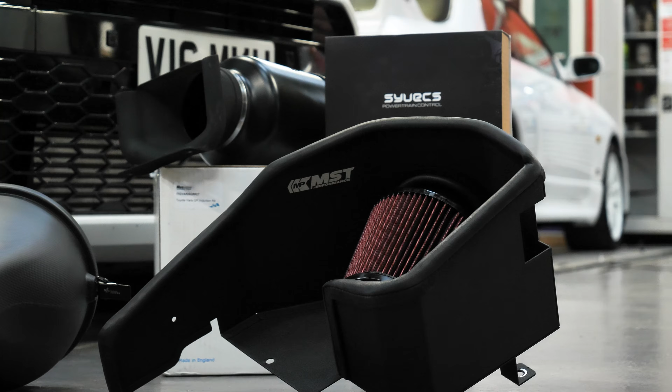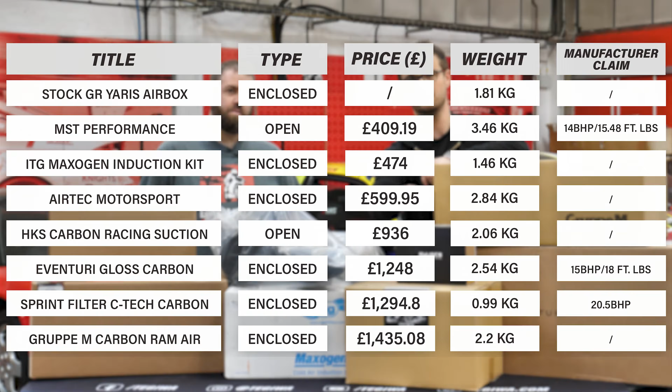Fresh off the back of our GR Yaris exhaust test, today we're doing an intake test. So we've got 7 different filters here today, ranging from open ones, closed ones. We've got Sprint, Eventuri, HKS, MST, ITG, Airtec, Gruppe M as well, and we've got a Syvecs all-wheel drive diff controller as well that we're going to use on the dyno, so we can put it in burnout mode and take some figures.

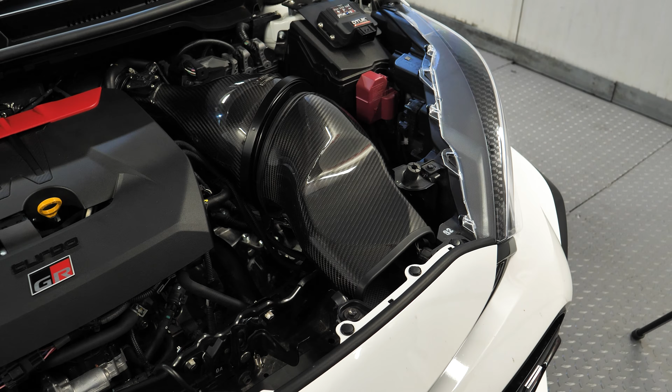What do you think is going to perform well today, Matt? Well, on the road, I think that the enclosed ones are going to be good. We've got the Eventuri and the Sprint, which we've already seen from other Yaris owners, giving really good gains. So keen to see what they do, but depends what you want, really, doesn't it? If you want the noise, then you can't beat an open filter, can you?

Yeah, I think it'd be interesting because people go for intake for a few reasons, don't they? Sound, the visual appeal, and also the performance. So there's 3 different factors there, and they start from £400 up to 1,400, I think. So there's a few different options there. So we're going to start unboxing some, do some data logs on the standard filter, and jump right in. So let's get on with it.

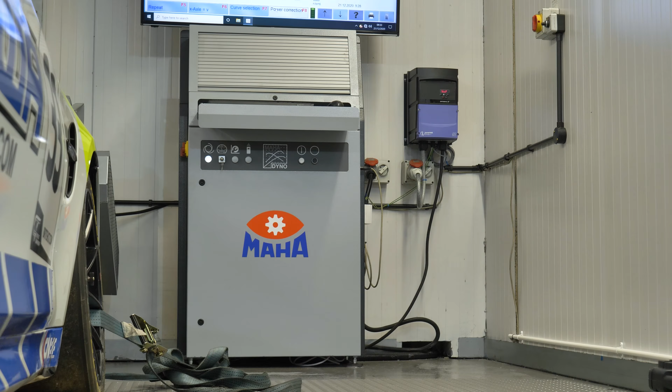So the GR Yaris, as we all know, is a 4-wheel drive car, but they are notoriously hard to dyno in 4-wheel drive mode. So unfortunately, here we only have a 2-wheel drive dyno. So to make it a 2-wheel drive Yaris, we've got this Syvecs powertrain control unit here. This is a quick install into the boot, and it enables the rear diff to uncouple when we pull the handbrake. So we can just dyno it with the front wheels on to make it super simple and super reliable. So we're going to chuck that on, get the standard car on the rollers now and see what it's making.

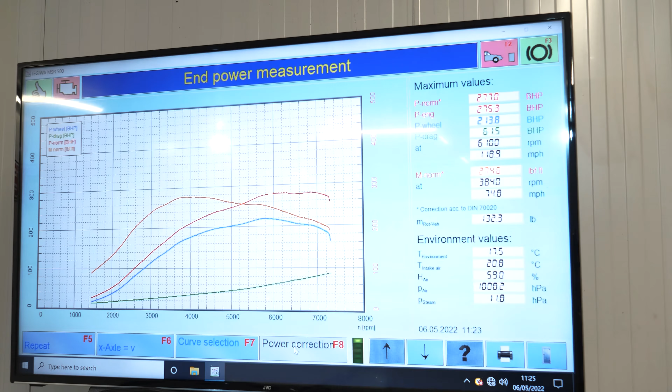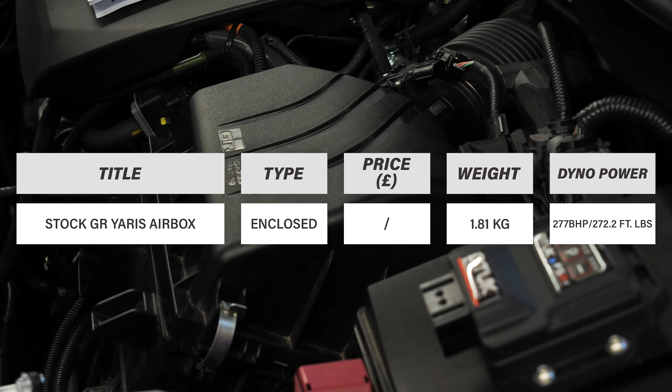Right, this is my GR Yaris, and here is a standard airbox. So first of all, just a quick disclaimer, you might notice this box in the corner. It's a DT UK Stage 1 tuning box. It is going to be disconnected for all of these because I know that most people won't run something like this. So we do have this blanking connector that's just basically bypassing that box and letting it all run as it was standard. So just ran it up with this standard airbox in place.

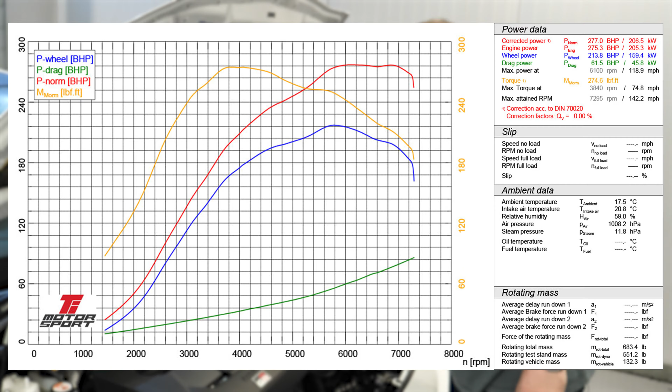It's around 277 horsepower, which is great. So that means that it does have an ITG panel filter in here, and the GPF delete from the exhaust test, I kept that on the car. So 20 horsepower over claimed, which I'm really happy with. So some of the airboxes that we have today finish here, which is just at the end of this flexi pipe here, and some of them go all the way to the turbo elbow, which is going to make things a bit toasty for me, but that's okay.

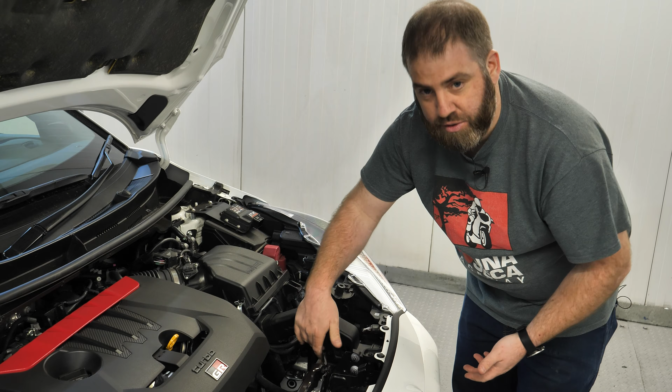And so the standard airbox has a little feed here that just comes from this little vent in the grille. The standard one though, if you look underneath it, it's got holes in it. So the air path's a complicated thing, but some of the air, as far as I can see, that comes in here can just go straight out again. So a lot of the airboxes that we've got have a dedicated feed that fills this sort of void here, and hopefully should provide some good gains. So the MAF housing on this, we've got not too much of a lead up to it in a straight, but we'll pop the airbox lid off in a second and have a look.

Afterwards we've got a nice straight pipe here. So what's important is that we get a similar sort of effect on the other airboxes for this to work as it was originally intended. It's okay to have it on a bend, it's okay to have it wherever you like, as long as it's kept consistent, because the manufacturers will calibrate their standard map to suit this in a particular orientation or direction.

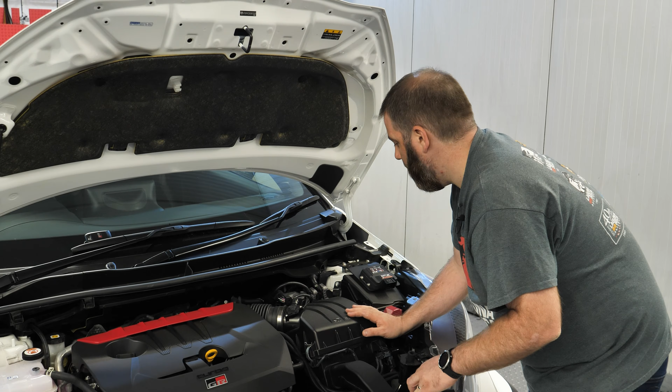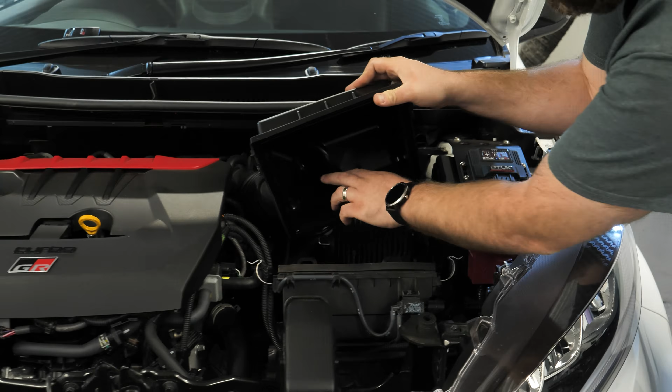So we'll see. I think this is going to be the biggest effect, how we can get the air smoothly past this and keep it repeatable. So right, let's have a look under the airbox lid. As mentioned, I do have an ITG panel filter in this. As we can see, there's not an awful lot there before the MAF, so air's going to be not the straightest, but again, Toyota have calibrated it to that, so we should be okay.

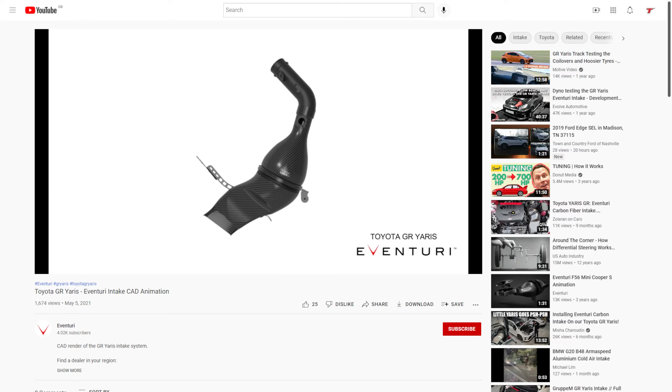And as I say, when we were doing the unboxing, especially the Eventuri, they've done a lot of CFD, a lot of their own testing, so expecting that to work really well. Okay, so the next one is the Airtec system. This retails at £599, just a little smidge over, I think. This is an enclosed system. We were going to unbox it, but there is no box, so we're going to unplastic it. Comes in two different pieces, so let's unpack it. Done.

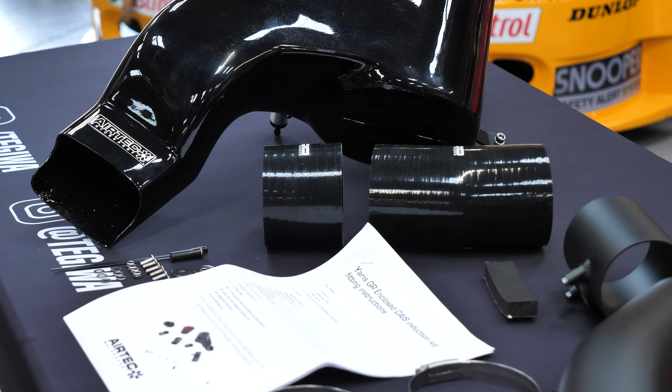Okay, so just unplasticed it, and got a couple of silicone joiners here, hard pipes, nice finish on this, nice Airtec logo, and nice gel Airtec sticker on the front of the intake. We've got some instructions with it. Something that's interesting, I don't know how much of a difference it's going to make. We saw on the MST how long the MAF housing pipe was. On this it's quite short, so whether some turbulence will happen, I don't know what effect it's going to have. It'd be interesting to see.

No air freshener again though? No. They've really set the bar there, didn't they? I mean, set the bar high. Yeah, I don't think we're going to get that with the... I'm going to be disappointed for the rest of this video, to be honest. Yeah. Well done, honesty.

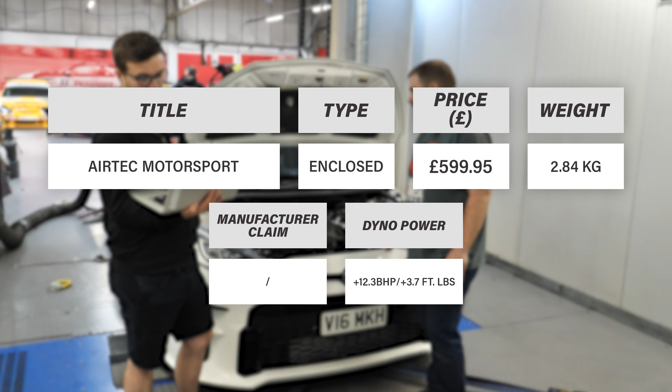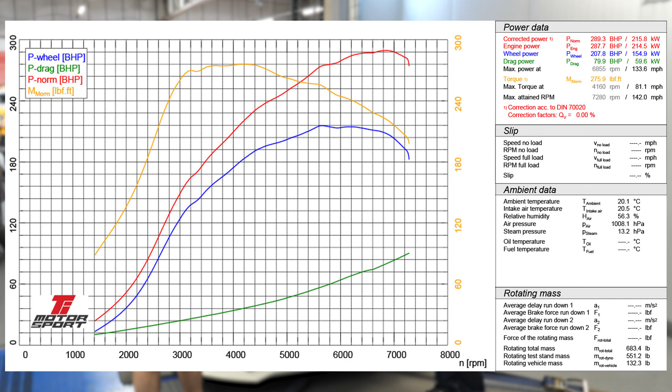Yeah, so this made 289.3 horsepower with 275.9 foot-pounds of torque. So it is the best so far, but it's also 130 quid more expensive than the MST we've just tested. So if you're super precious about getting an enclosed one, then you can fit that and certainly not lose anything. It does still sound good, it's difficult to justify the MST right now, isn't it? Probably didn't sound as loud as the MST either, but that's probably because it's enclosed. But Airtec do an open one as well. We're not testing it today, but that is an option, and that's probably going to be cheaper as well. So yeah, on to the next one.